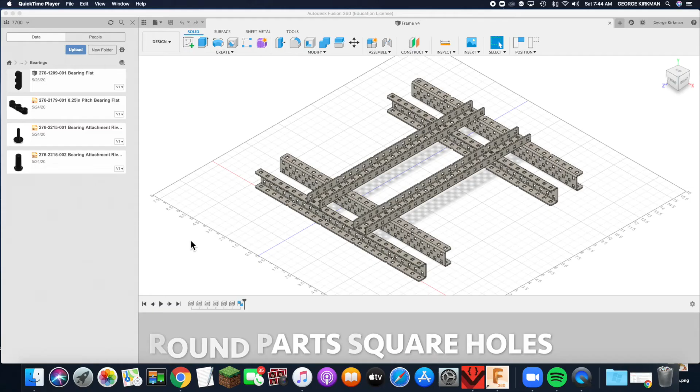Today we will show how to place a part that has a round hole and align it with the center of a square hole. For our example, we're using the same frame we've been working on, and we're going to put a bearing on one of the C channels.

I've navigated to the kit of parts where the bearings are, and I'll right click, insert into current design, and it comes over to a center position. Rotate it 90 degrees this way, and then I'll just pull it down the line here.

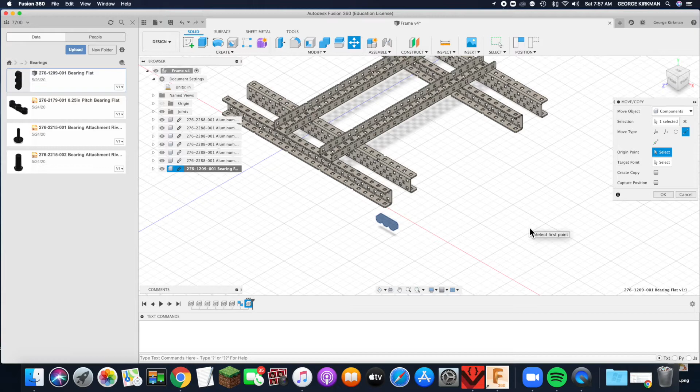Now I'll go to my point to point move, orbit, pan, and zoom a little bit to find the circle that I want to match with the square hole. Click on it, make sure the center point is marked.

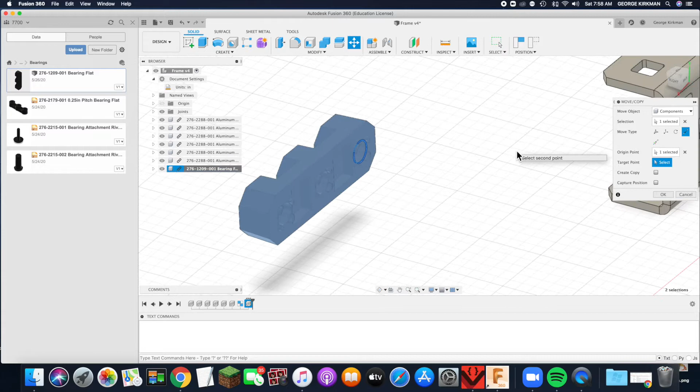Now I've gotten the center of that circle, but I can't put it to the center of this hole because there is no center of the hole, that's just empty space. I'm going to put it to the center of this edge line, and then I will move it.

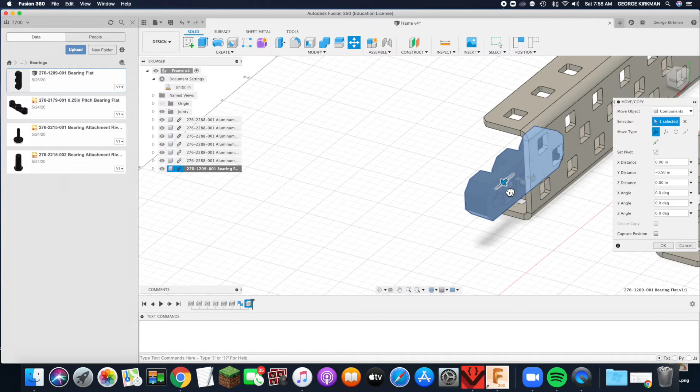If I move it 1/2 inch, it'll line up exactly with that hole, but I want to move it down 3 holes, so I need to move it 1.5 inches. If you need to move it some other number of holes, it just needs to be an integer number of 1/2 spaces, so every number will end in either 0.5 or 0.0.

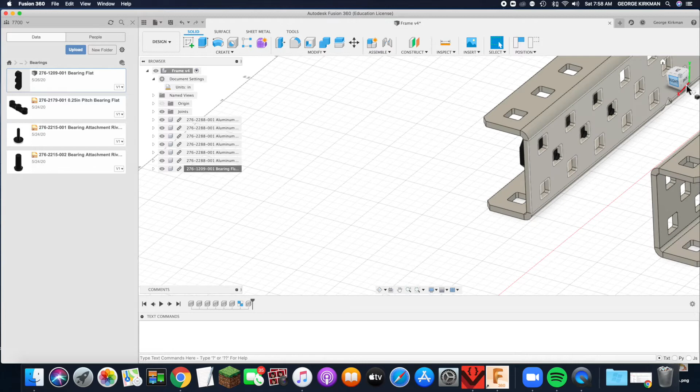We click OK, and if we move around to the side view, we'll see that it is lined up exactly with the holes.

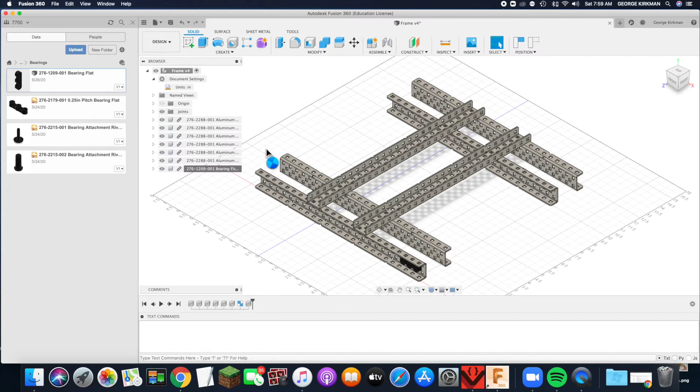Another way to do this is to insert a bearing into the current design. Again, we move it out. We need to rotate it 90 this way, and we need to rotate it 90 this way, and slide it on down to the other side.

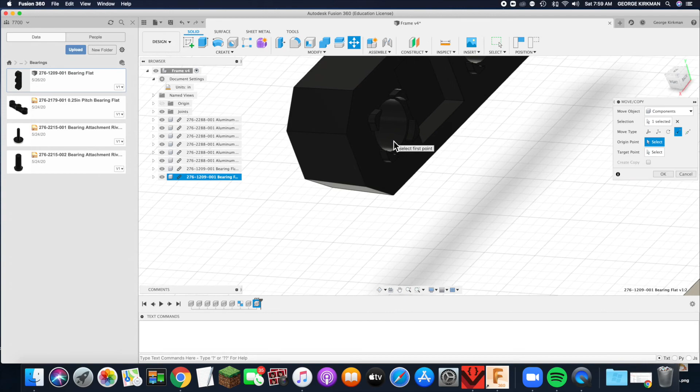Now this time when we do our point to point, select the hole that we're working with. We are going to put it to the edge of the hole that we want to align it with.

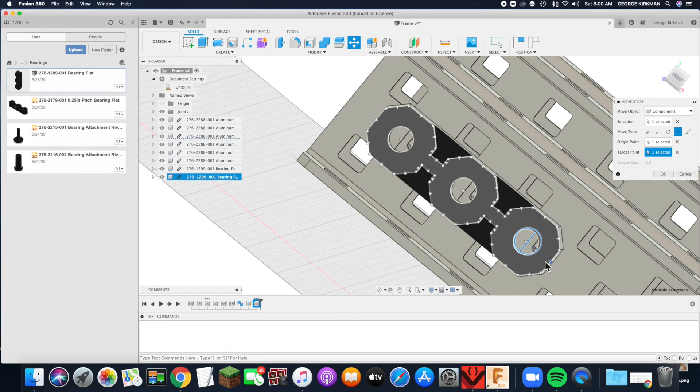So now we have it at the edge of that hole, and we just need to move it a distance of 1/2 hole down the line. Earlier on we had measured that the size of these holes is 0.182 inches, so the number we have to move is half that, or 0.091. That should put us exactly in the center here.

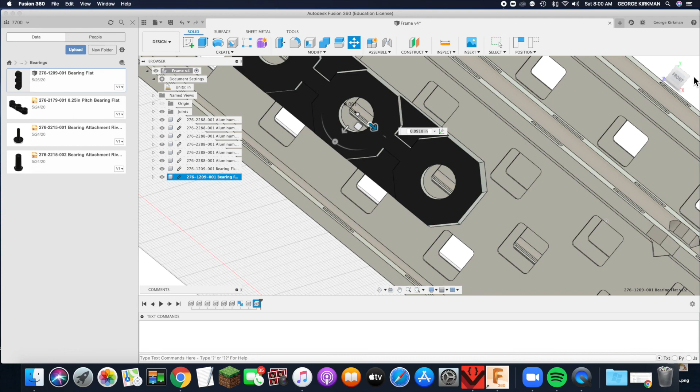And if I click on this so I get a straight on view, I can see that it's correct.